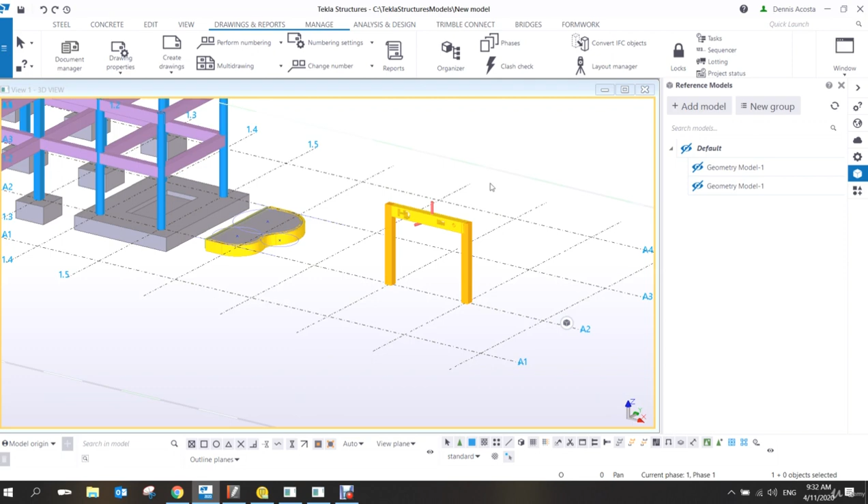But the very basic one is the rebar group. This is something like the origin of adding the reinforcement, the rebar group. So we must know the rebar group so that we can do a lot of things. We're going to discuss about the rebar group first.

So from your concrete part, the easier one to show is this pad footing. So we will start with the pad footing. What I will do is I'm going to select the pad footing, right click, and then create 3D view of part.

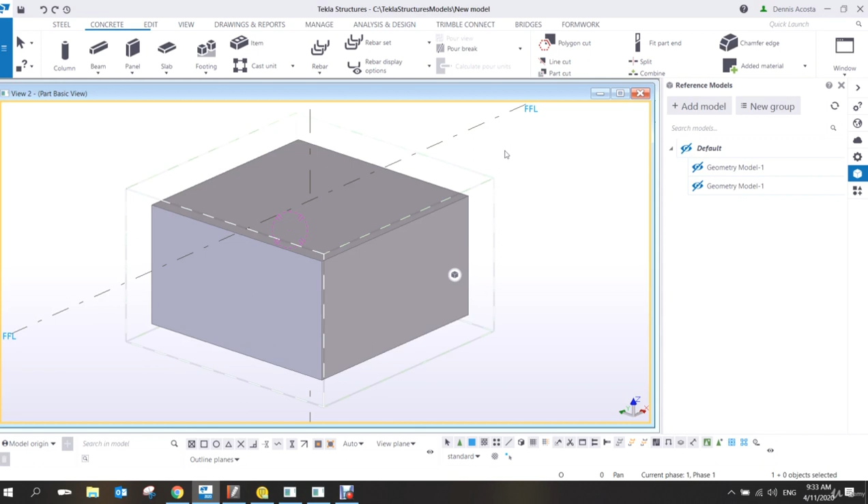Alright, so now since the reinforcement is inside the concrete, we must make it transparent, correct? Because if this one is not transparent, we will not be able to see the reinforcement inside. So just simply press Ctrl 2. Alright, Ctrl 2. Yeah. So now, from the concrete tab or menu, you can see here there is a rebar.

Right? Rebar. Under the concrete, you can see the rebar. This one is the bar group. So from the bar group, you can see here there's a bar group, there is a bar.

Bar group means it's a group of rebar, meaning this one usually used for the links, lateral ties, and if you have many rebar, continues. Then bar, meaning it's a single bar. So you want to create a single bar, that one is only for the bar.

Example of that one is something like a trimmer bar or trimming bar, lifting hook. So that one you can use the bar, meaning you create an individual bar.

And then you have the curved bar group. So curve, if you have something like a curved beam or curved wall, circular bar group, this one usually used for the circular column.

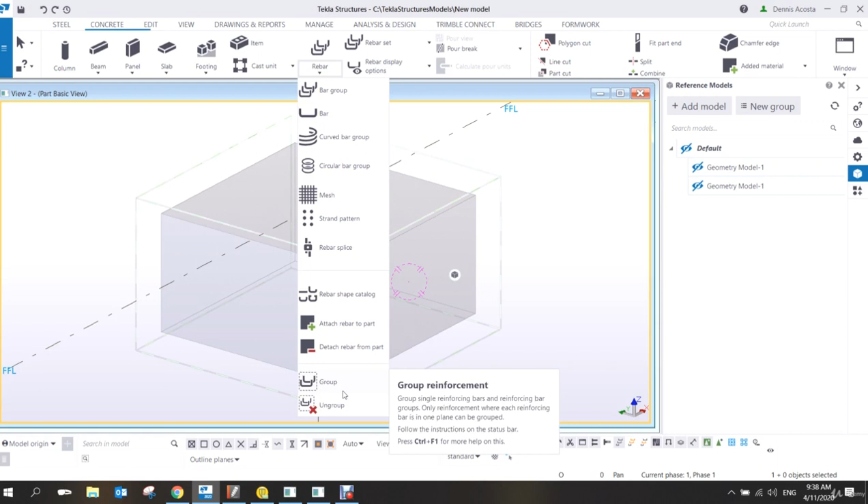And then you have also the group and ungroup. So when you create a link of the bar, when you click one, everything is selected. When you select ungroup, meaning you can dismantle that one. You can select one by one, and then you can group it again.

Okay, so that's the bar group. So first we need to go to this bar group, select the bar group, and then look at the right hand side.

Okay, so from the right hand side, you can see under the general, there is a bar group type. The bar group type is not only a normal one, but if you pull down the menu of the bar group type, you can see that there is a normal, there is a tapered.

So if you have a tapered, it's only tapered is something like this size going smaller, so that's tapered. But tapered ridge is something like a roof, small, big, small. So you can use that one.

Especially if you have a beam that is tapered. Actually, usually I see that one in a precast beam, which is tapered like a roof. You have a tapered curved.

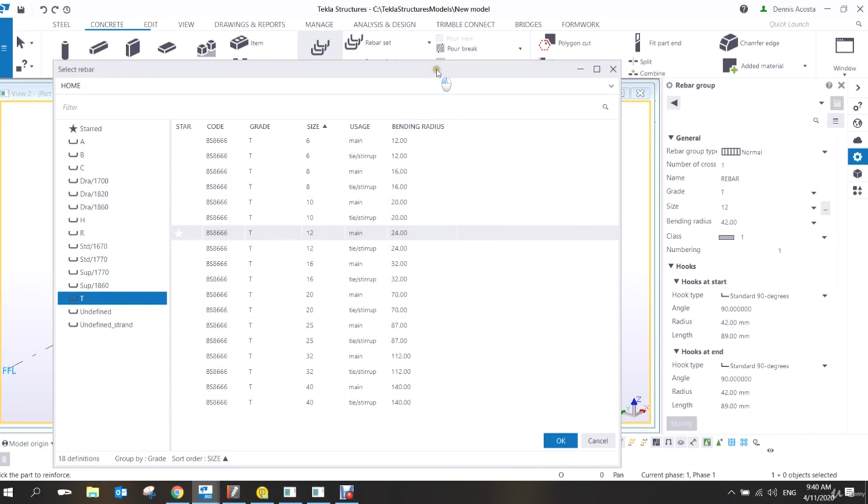Then the name, of course, you can put the name of your rebar. The grade, if you look onto this grade and size, this one is a combo. You cannot have a size without a grade. So if you click on this size, as you notice here, these are the grade available, and then under the grade you will see the size.

So let's say, for example, we're going to use the H. H is for the Eurocode. Nowadays, Singapore is using the Eurocode. Before, Singapore used T, now they're using H. So select the H, and then let's say I'll choose 16, and then click OK.

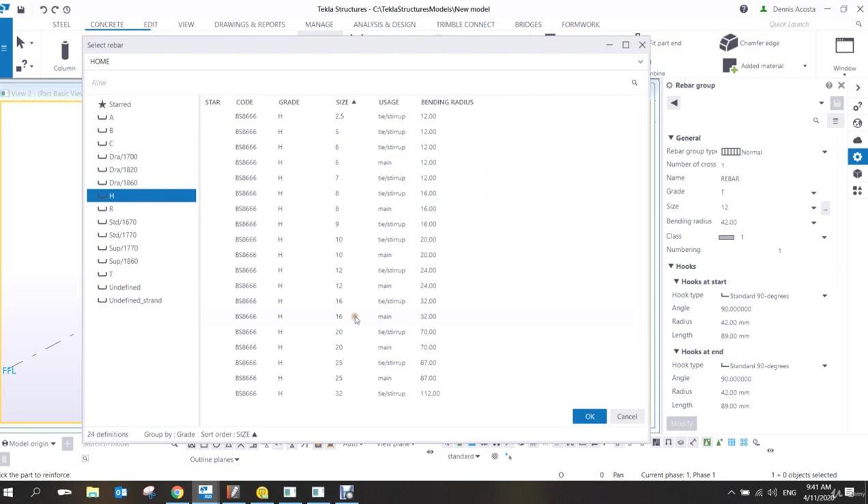16, H16, either tie or main, doesn't matter. So now 16, and then the bending radius of 16 is 32 by default, times 2. The bending radius, that one is inside the rebar database.

Now, what is rebar database? Before we go further, so that you will know, hey, this is where I got this 32. So let me show you where's the rebar database. From your C drive, Tekla structure, I don't know if you install in Tekla structure or Tekla structure program files.

So here 2020, I have the environment, Southeast Asia, general. So I have this profile, and under the profile, you can see here rebar database INP. So if you click on this one, you can see the rebar database here - all the H, all the A, B, C, R, T, undefined, and so on.

So if you want to delete the size of the rebar in the library, then this is the place. If you want to add the size of the rebar, let's say H13, that one is not common, right? I think only Singapore had H13, or maybe here in Southeast Asia H13.

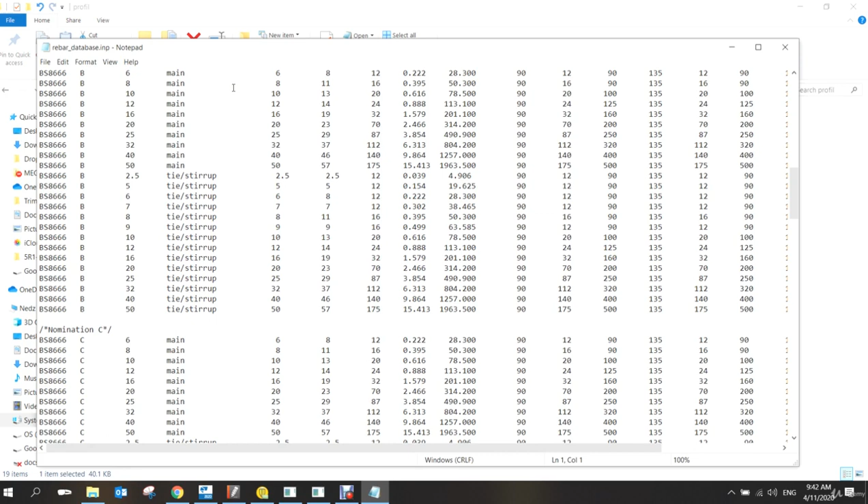It's not here in the default, so you can add here in the rebar database. If you have those properties, then you can add. Now, if you want to introduce another grade, then this is also the place to introduce the new grade of the rebar. So again, rebar database INP, close it, now I'm going to close it.

So here 32, I can change that one anytime. And then the class number, maybe I'll choose 2. For the meantime, you can see the hook - you can see the hooks from the start and the end. At the moment, kindly select no hook.

Okay, no hook. And then the cover thickness, you have on plane, from plane, start and end. For the meantime, again, you type 0, 0, 0. So I don't want you to have any value there. I want you to put 0, 0, 0.

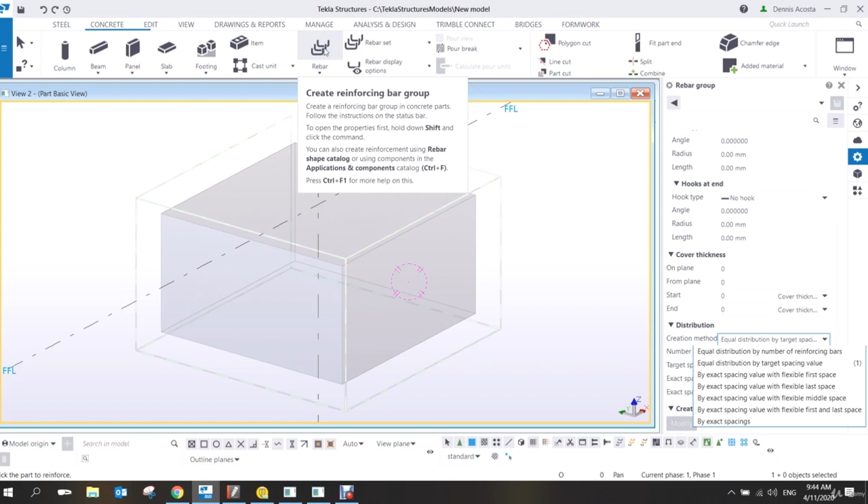And then under that one, you can see the distribution - you don't have distribution. Maybe you are selecting the bar, not the bar group. Yes, because the bar is individual. So you go back to the rebar and select the bar group.

So distribution, you may ask, hey, how to distribute this one? Here, there are different ways to distribute the rebar. What is distribution? That is the spacing. So let's say you pick this range, this 3 meters, and I want my rebar to be 200, 200, 200, 200. So you can choose by target spacing value.

Now, in these 3 meters, I want to have 20 pieces of rebar. So instead of putting the target spacing, you put the number of reinforcing bars, 20 pieces. It doesn't matter what the spacing is, but I want 20 pieces there. So you can choose the number. And you can have this exact spacing.

Exact spacing is similar to what you are doing manually, where you calculate how many rebars. So let's say in the moment connection, I have 10 pieces of rebar spaced 50, 50, 50, and then after that, 20 pieces at 100, 100, 100, 100. So that one is under the exact spacing. Okay, so that's it.

I just want to explain that one to you because later on we will use it a lot, so we need to know what we are dealing with, right? So now it's time for us to add this rebar. Once you click the rebar group, what does it say? What's the next move? Pick the part to reinforce. So what is the part to reinforce? The footing. So I need to pick the part.

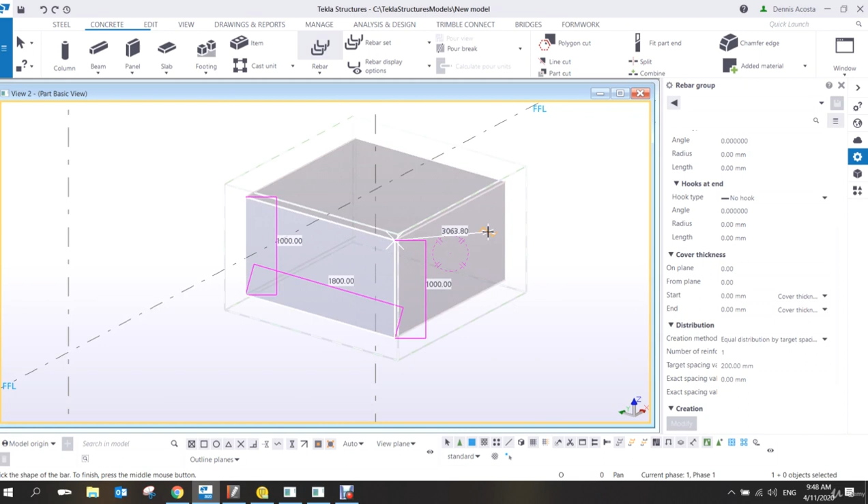Now, in adding the rebar, look, I pick 1, 2, 3, 4, right? In adding the rebar, it's very important for us to look at the numeric values. If you notice here, 1,000, 1,800, 1,000. Is that correct? You can decide. Because if you zoom out too far and pick the point, you might think it's correct. But you can easily identify whether it's in the correct position if the value has decimals, let's say 1,001.25. That's not a common size for concrete. So you can double check that you picked correctly.

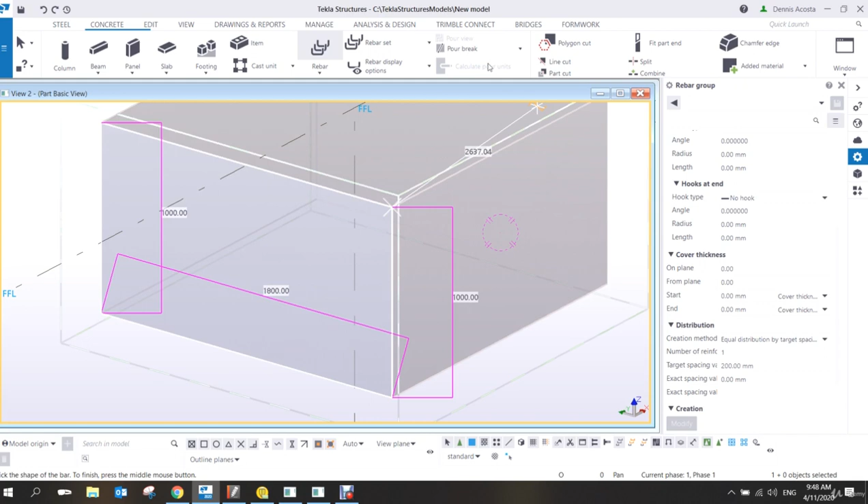So now 1, 2, 3, 4. The next step, if you're done with the shape, is to simply click the middle button of your mouse. Then the next step is pick 2 points to indicate the range. So from where to where? I have the U shape, I pick from this edge, from this point to this point. And that's it. You already have the reinforcement.

Okay? Any question? So, did you manage to do this one, everyone? No.

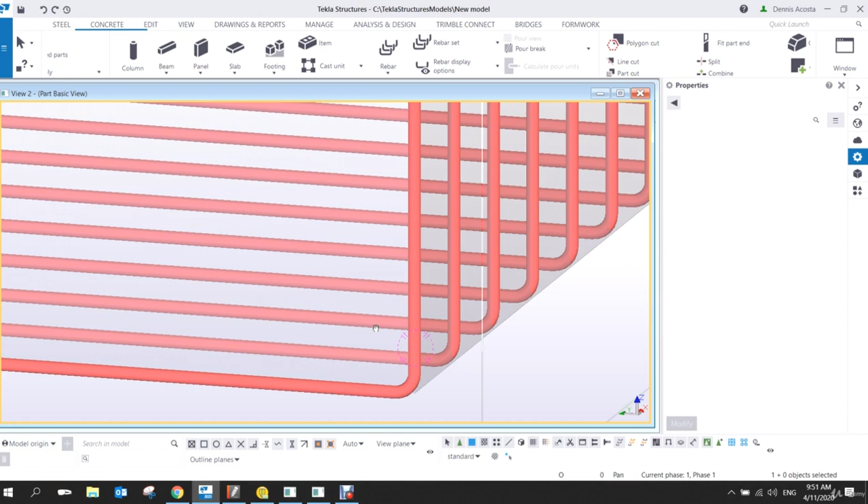Okay, so let's continue. As you can see here, the reinforcement is at the edge of the concrete, meaning we haven't done the cover, so the reinforcement is still exposed, right? So the first one we are going to change is the cover on plane. Select the rebar, and in the properties you can see on plane.

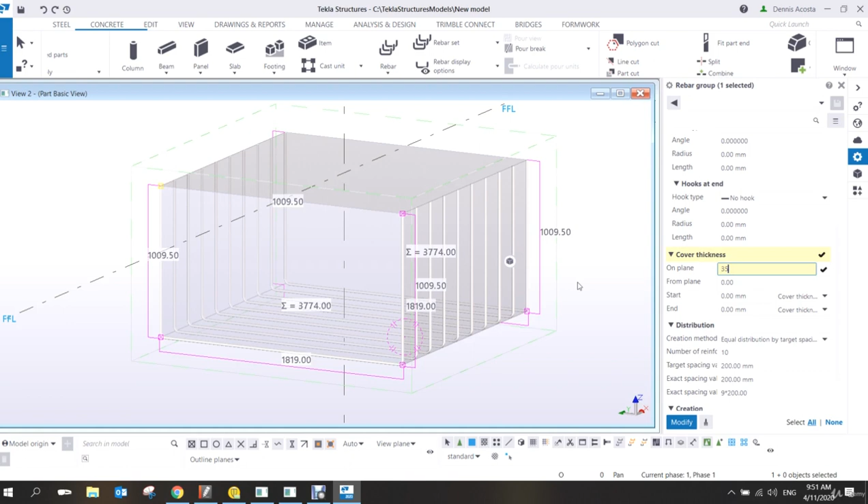So what is on plane? On plane is the cover on the shape that you pick. Let's say we put 35 millimeters, enter. Look what happens. Now it comes inside from the shape that you picked. So that one is the on plane.

Now, if we want to have a cover on the range, that will be from plane. So let's say we type 50 from plane. Or maybe, let's say 100. So that one is the from plane.

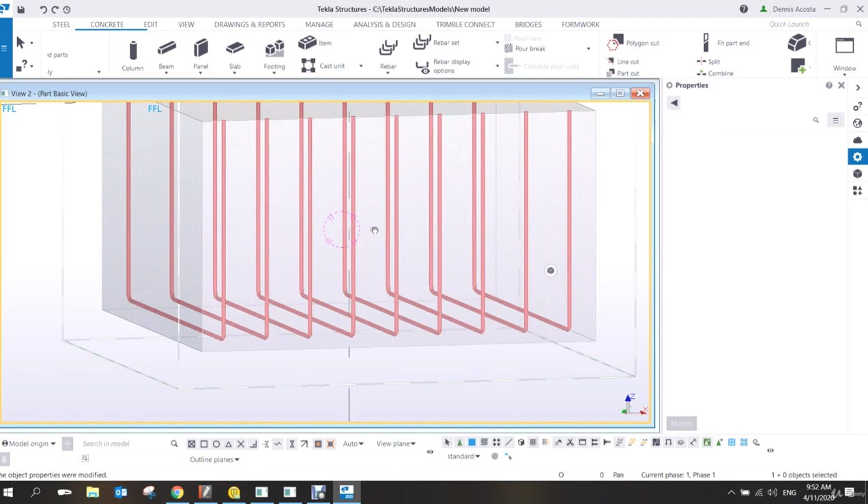Next is the cover at the start and the end. Again, yellow is the start, magenta is the end. So if I type 50 here, and at the end also 50, then enter. Now you have the cover of 50 at the end.

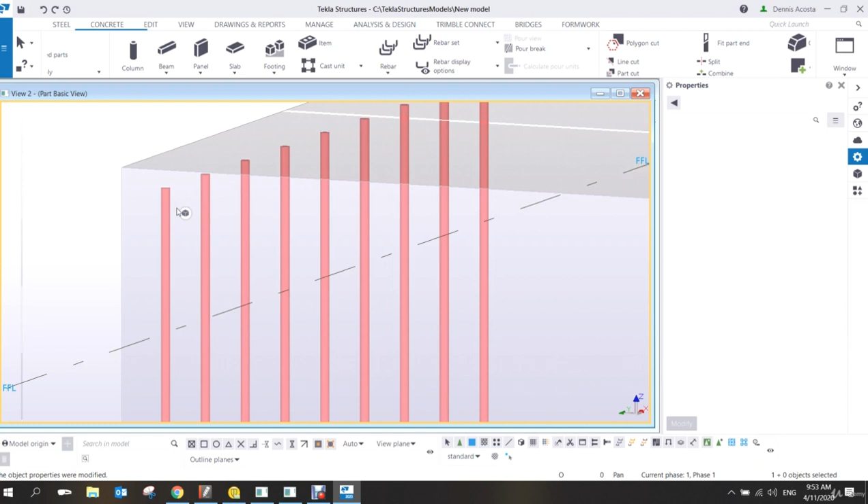Now the question is, I want my rebar to be exposed at the top. All you have to do is simply change this one to negative. Let's say negative 200 and negative 200, then it will be exposed. See? Now you have the exposed rebar.

Okay? And then going back to the hooks. There are standard hooks here: standard 90 degrees, standard 135, standard 180, and custom. So with standard, you cannot change anything there. Because if I click here, standard 90, modify, it will just bend 90 degrees, but I cannot change the radius, I cannot change the length, because it's a standard.

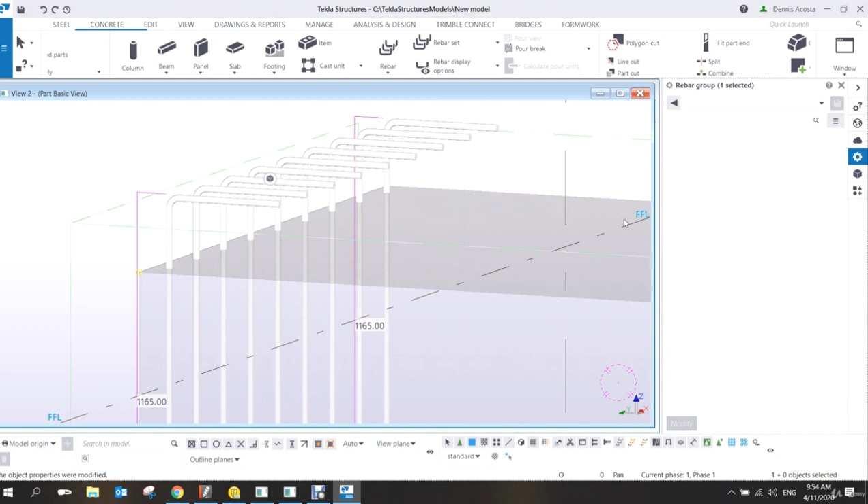Okay? But if I change this one to custom, then here, length, I can change this one to 300, enter. So now I can even change the radius to 20. Question? For the length in the hook, is it counted from the start or the end of the hook? Here, end of the radius. That's the reason why when you measure that one, it is more than the 300. Yeah.

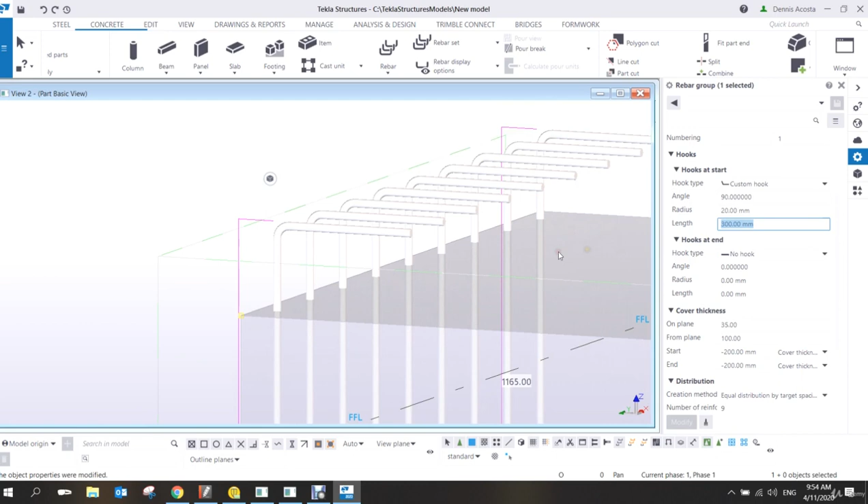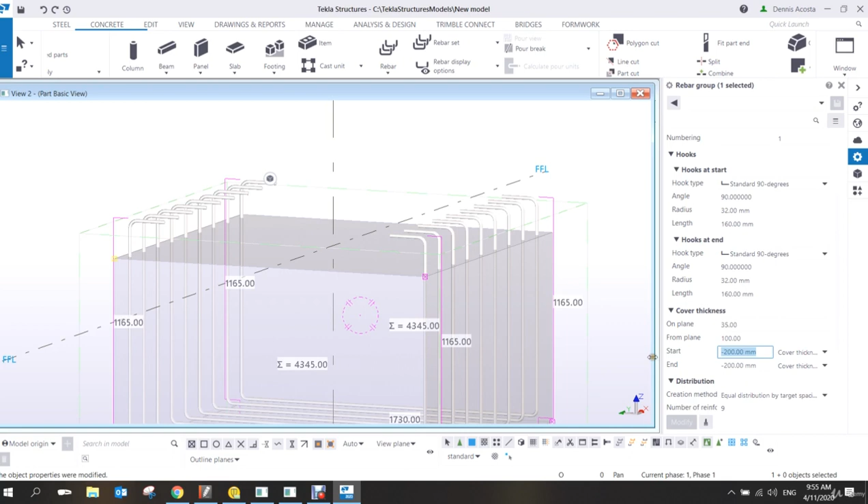And then here, also, if you want 180 degrees, then that's the hook. Okay? So for the meantime, maybe we'll choose 90 degrees and then here 90 degrees and then modify. And then again here we'll put 50 and then 50 so that it will be inside the concrete.

Okay, exercise. Create the U shape on the other side. It should be something like this. So we need to create the U shape on the other side. Same thing. Okay, kindly do that one. Maybe just simply change the color so that we can identify. So maybe I'll change that one to color green. So click. So 1, 2, 3, 4. Yes.

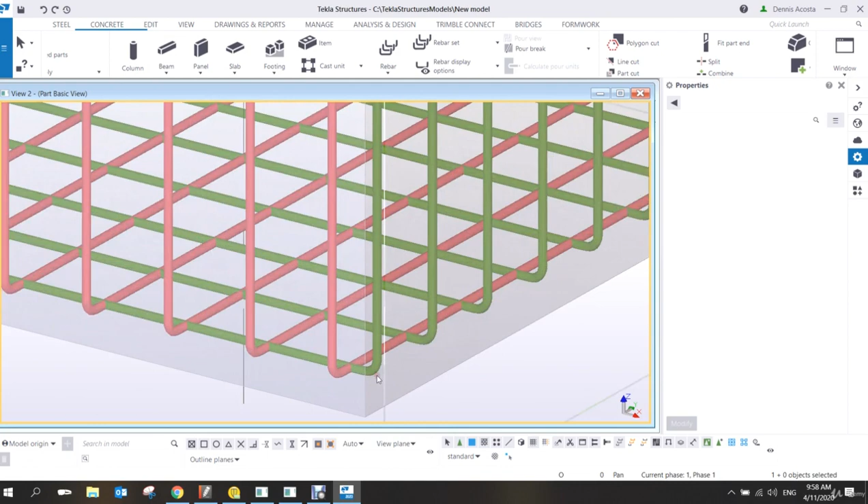Okay, done. So, what did you notice when you created this one? So here, if you zoom in, you can see that there is a collision, clashing, right? There's a clashing between the rebar because both have the same, what do you call that? Cover. Both have the same cover. So we need to adjust. So how to adjust this one?

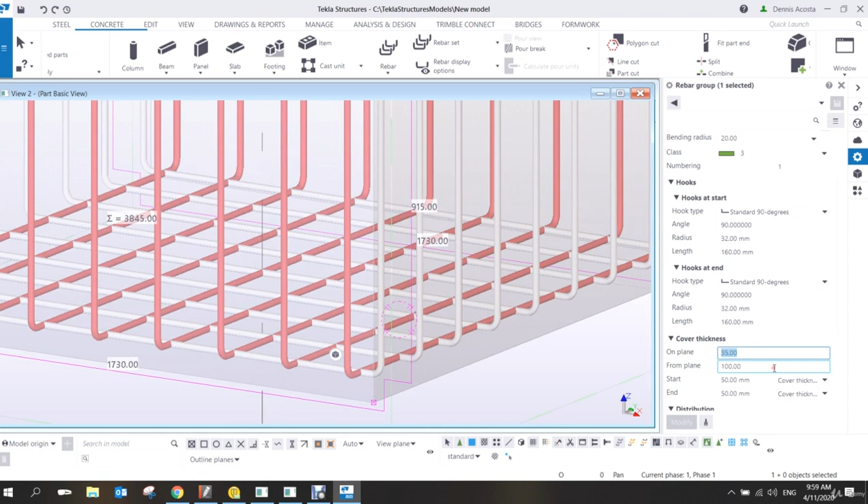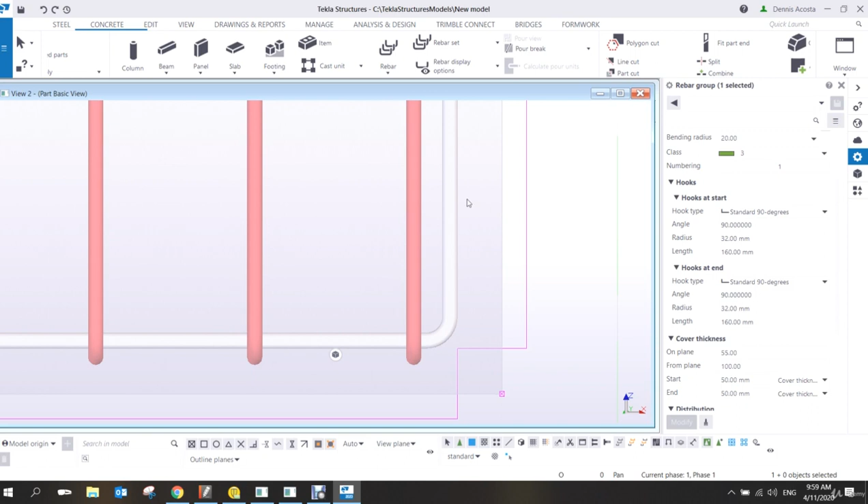So here, if I select one of these and then go to the on plane, you will notice this on plane is 35, 35, 35. Three sides, right? Now, if I change this one to, let's say, 45 and then modify, or sorry, maybe 50. Okay. Still, because this one is quite big. So let's say 55. The thing is, okay, there is no collision on the bottom, but here, this one becomes bigger. This one 55, 55, 55. But I want the sides to be the same, 35.

So what we need to do here is we need to change this on plane like a distance list. So similar to what we have done in the grid, there is a space. So we can do the same. So let's say here, the first leg, we need 35. So the first leg, I'll put here 35 space. Then the second leg is 55. And then the third leg is 35. So enter. So there you go. So now this one is still 35 and then this one is 55. So there's no clash between the two.

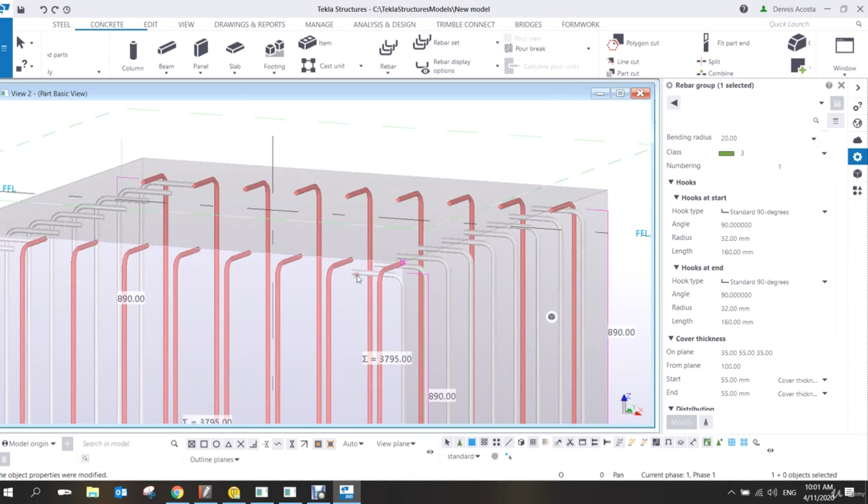Okay? Again, here on the top, you can just simply change, let's say this top, instead of 50, I'll put here 35 and then 35 and then this one should be 55. 55. That one is the start and end. The start, I put 55 so that it will not clash.

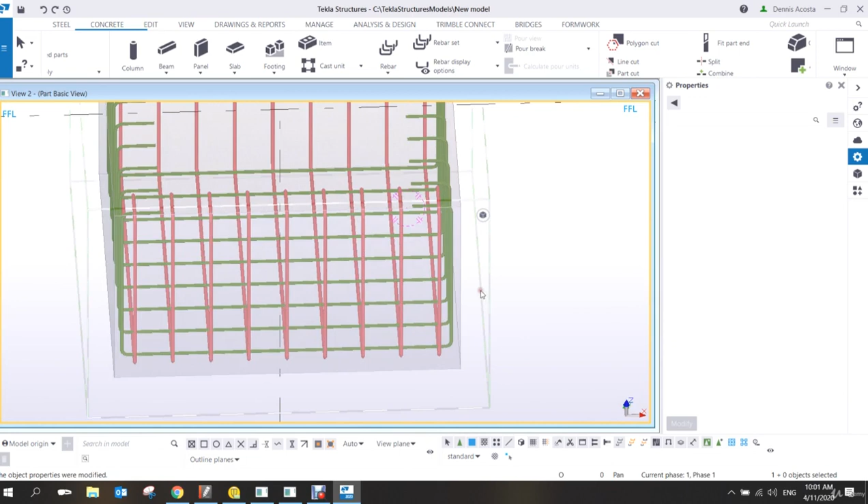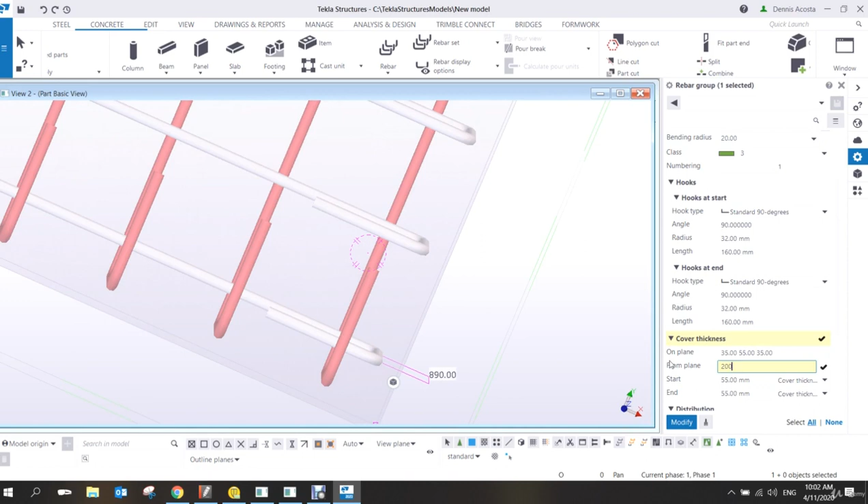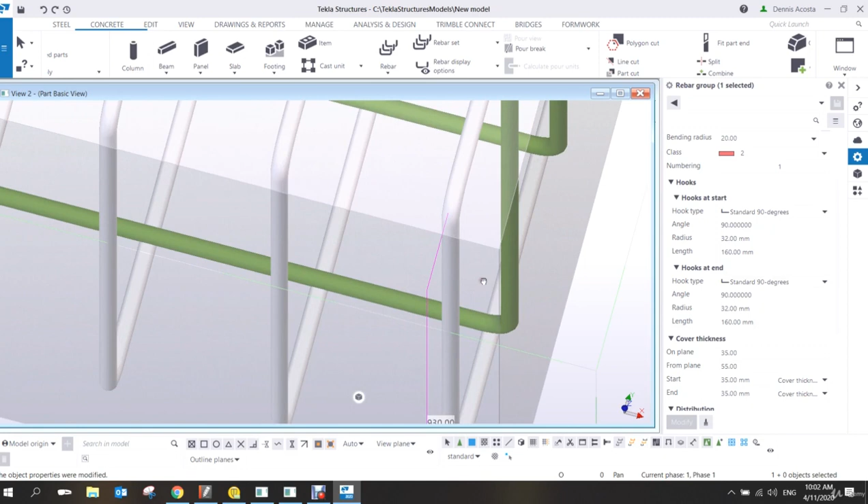Okay, what if I want one of the rebars to be in the corner? Okay, one of the rebars to be in the corner. What we can do is this. This one, I can adjust to 200. This from plane is 200, enter. And then this, I'm going to adjust this one to 55, modify, or maybe, sorry, or maybe 35. So that will be on the corner.

Yeah, that should be okay because we're going to add now the lacer bar. Okay, we add the lacer bar, the link, the closed link. So how to add the closed link? To add the closed link, we're still using the rebar. This time, use the 8mm bar, 8 dia bar, and then you can type here, let's say links. And then the class, you can use number 6. And then the hook, use 135 degrees. Hook, 135 degrees, okay?

So links, and then H8, okay? And then for the cover thickness, you can type here 25, and then the from plane, you can say 100, and then the start and end must be 25. Okay, remember this one.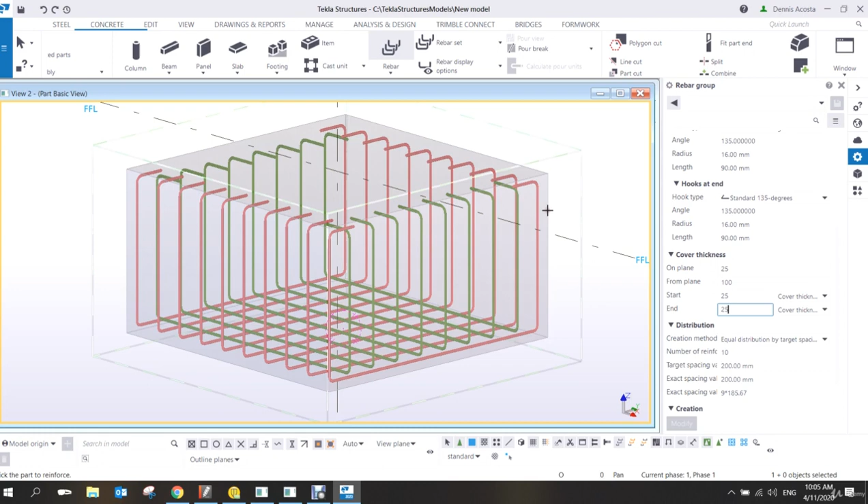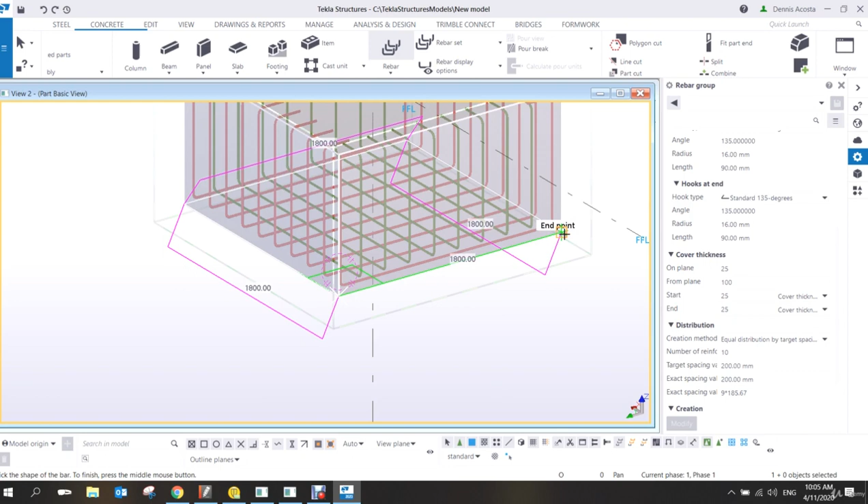So, now, pick the part to reinforce, the concrete. And then here, 1, 2, 3, and then rotate. 4, rotate, and then 5. So, meaning 1, 2, 3, 4, 5. You end where you start, because it's a closed link. And then middle button of your mouse. And then what is the range? From the bottom to the top. 1,000. And look, so you have a very nice lacer bar.

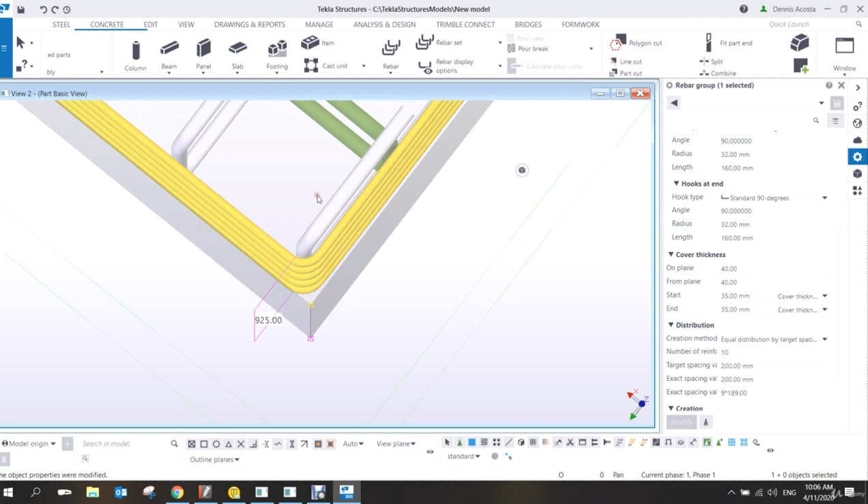Since this one is touching, maybe I can change this one a little bit from plane to 40. So you just adjust as necessary. Okay, so now we have the pad footing.

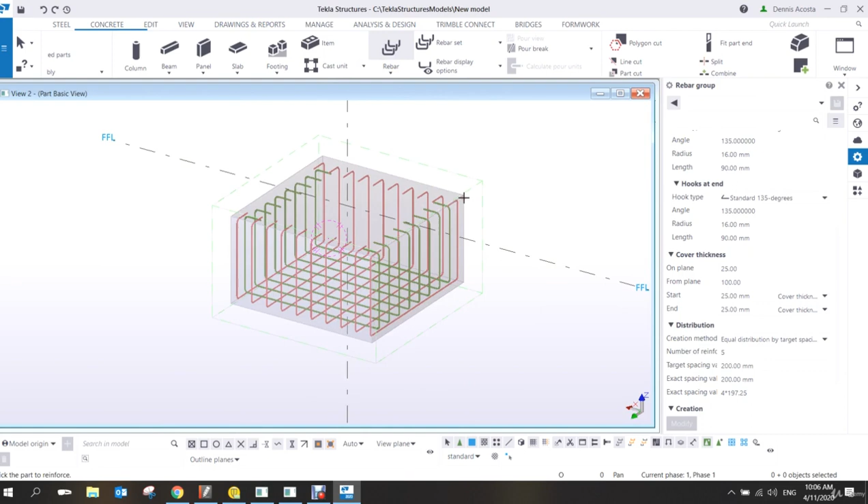Sorry, can you do this one more time? The lacer bar. You don't need to explain. So bar group. Pick the part to reinforce. You don't change any profile, still the H. But I changed that one to 8 mm, a smaller one. The side. So 1, 2, 3, and then 4, and then 5. Middle button of your mouse, and then 1, 2.

And there you go. How can you change your radius to 20? Because I only have two options, 16 and 32. You can just type.

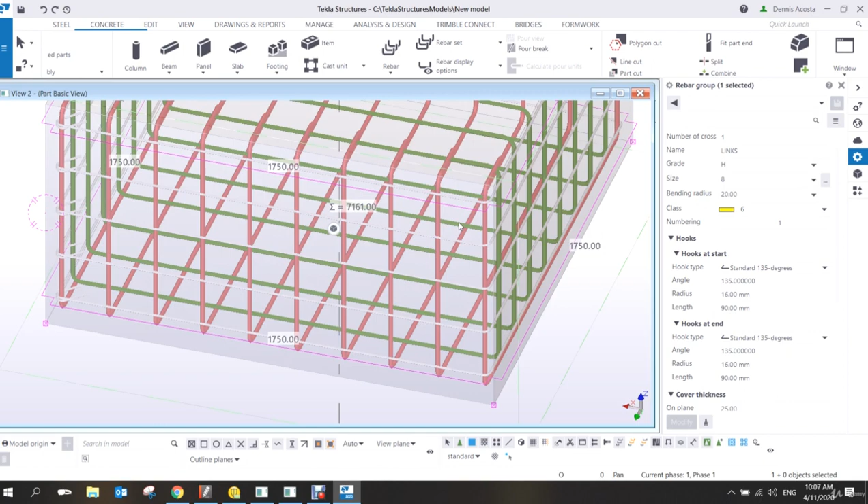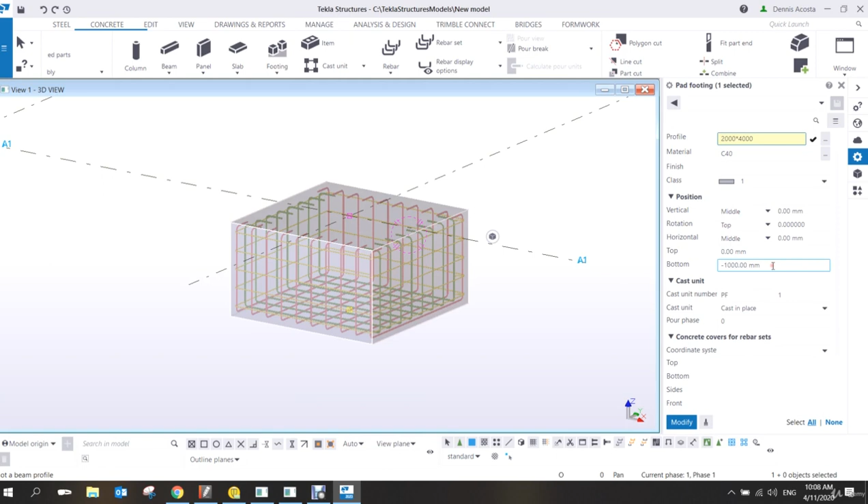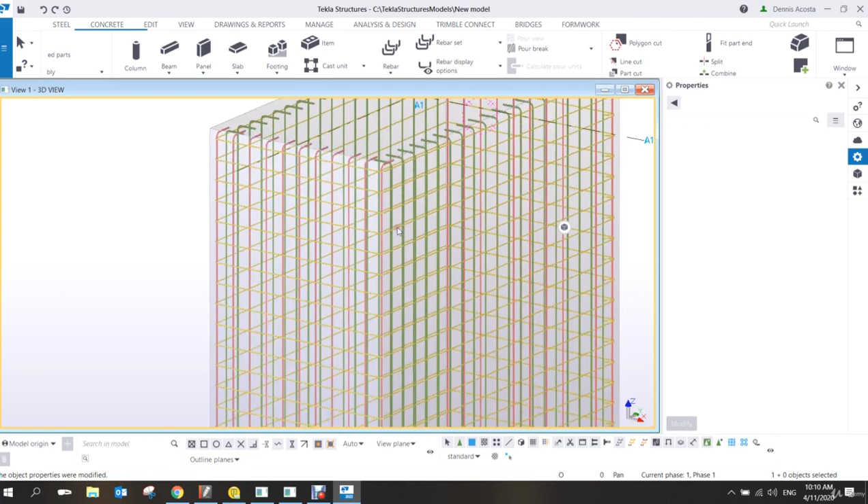Now, after that, kindly change the size of your concrete. Change any size. Let's say 1,200 by 2,000. Change also the height if you like. Make it longer. Exaggerate. So here, I'm going to put 2000 by 4000. And then here is, let's say, negative 5000. Okay, done.

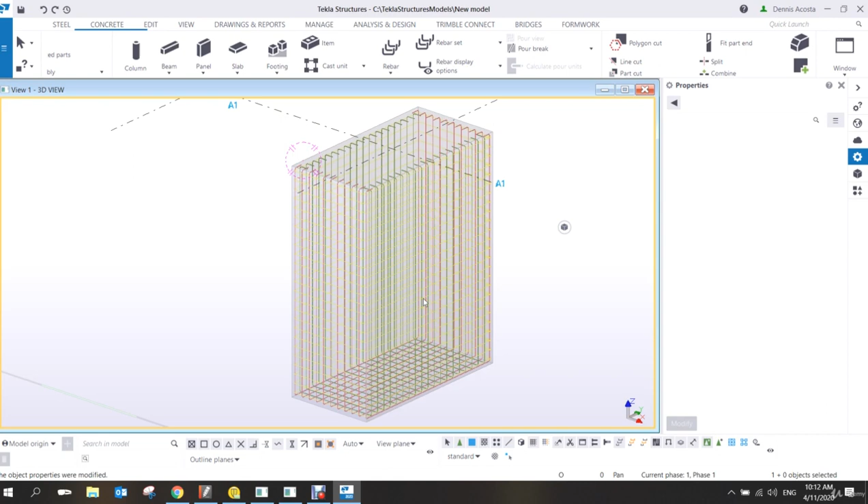So you will notice here, even if I change the size and exaggerate it, it will follow as long as you perfectly pick the edge of the concrete. And then the good thing is this: if you select assembly, and then you select this footing, select assembly, and then select the concrete.

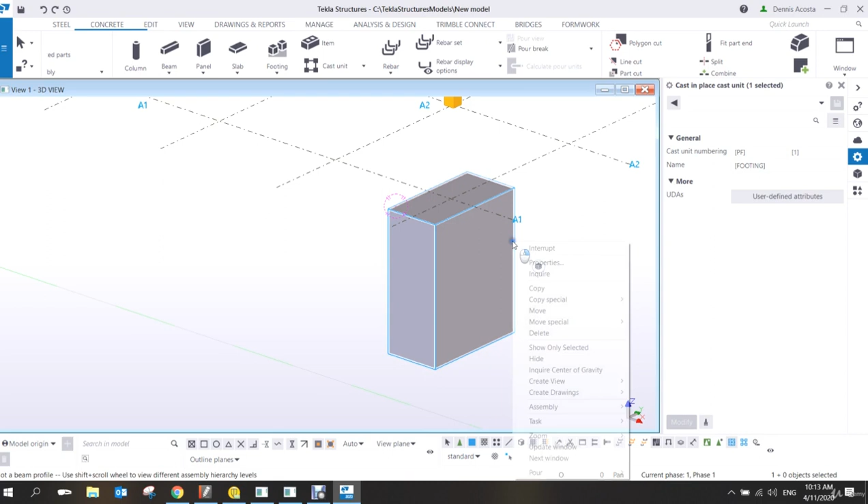Right click, copy all contents to another object. And then pick this one. Remember, from this size of the concrete, then I'm going to pick this one. See? So it will adapt.

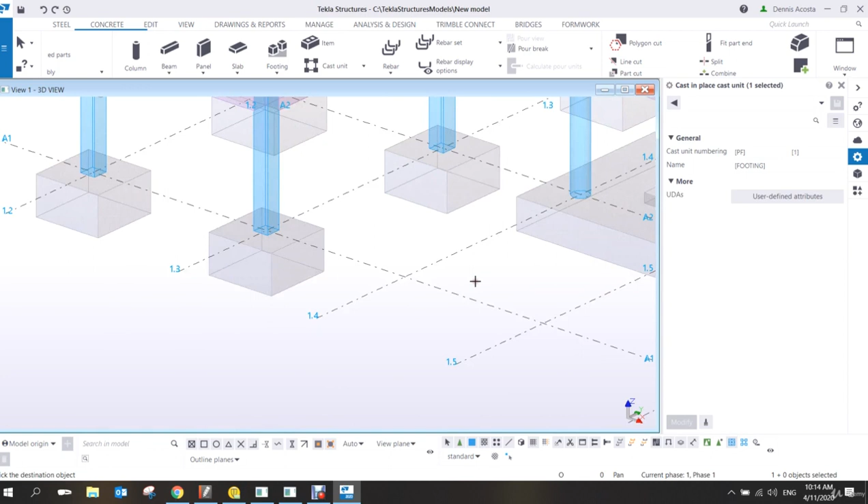Select the concrete, right click, copy all content to another object. And then click on the pad footing here, the smaller pad footing. So even if you added that one manually, it's already intelligent enough to adapt to the different size.

Click on your rebar. I want to see your properties, the one that you have now. This one. Yeah, correct. Standard 135. You can use 90. I just use the standard 135 for the bending at the end.

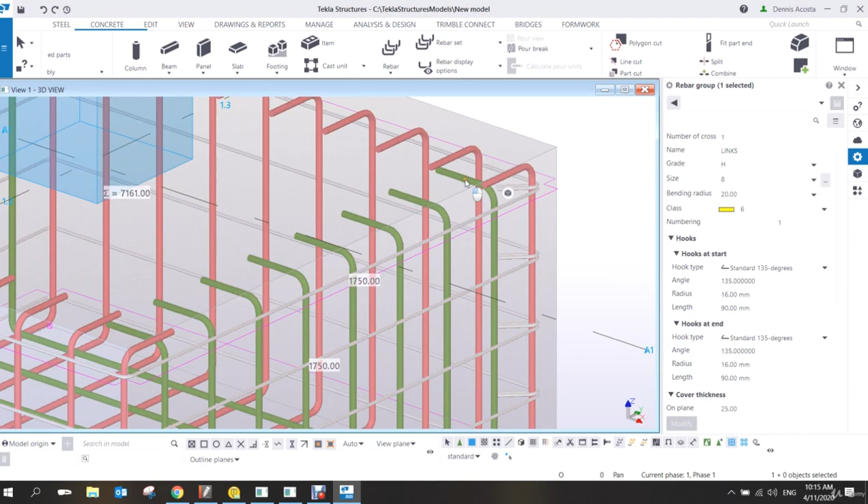This one is not a group anymore, right? It's just a normal bar? It's a group bar. Still a group bar. There are three groups. It's still a group bar. Yeah, see?

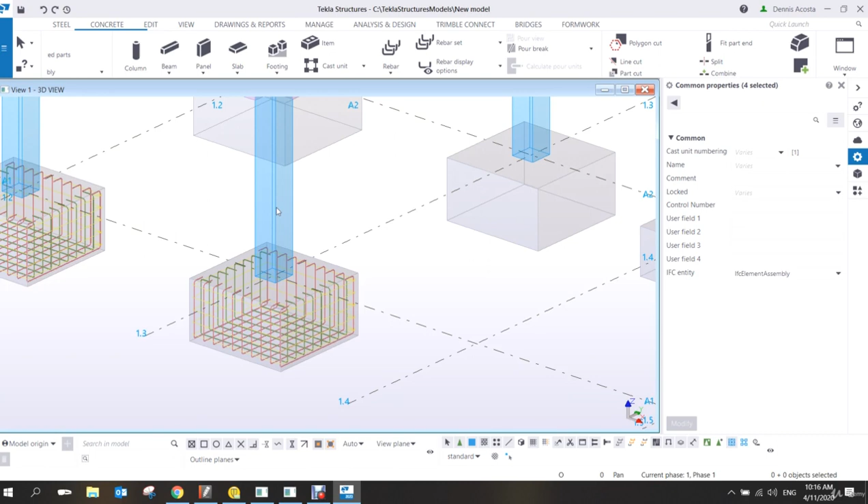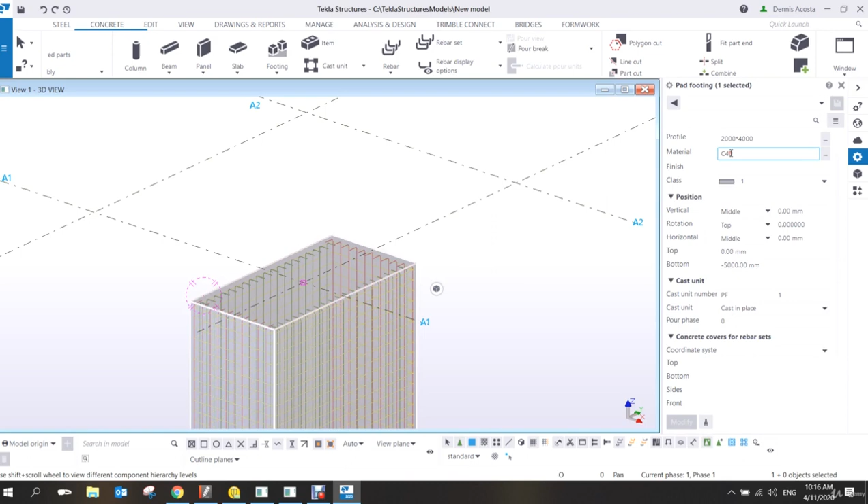The copy only works if it's copied to similar types. Similar type, yes. Let's say, for example, you want to copy this one to the column, it will work. But of course, not the way that you want, because it will be something like a small U bar in the column, which is wrong. Okay? Done?

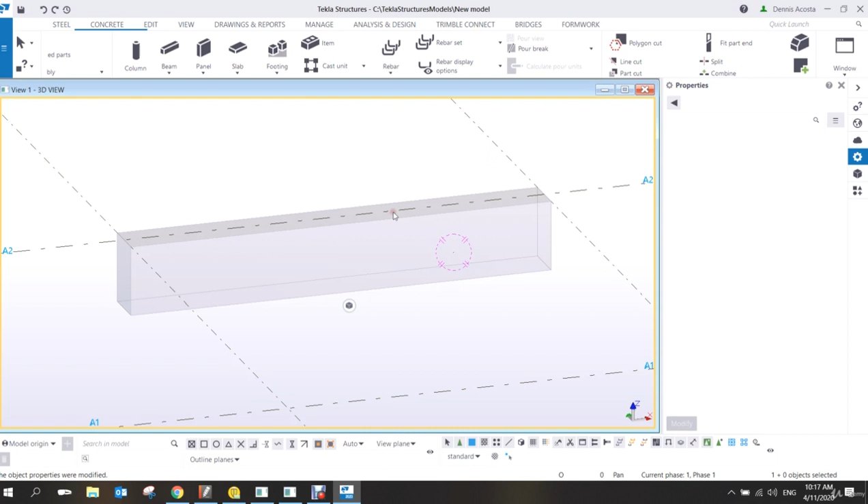So let's do the next one. Next, I want you to create a beam. Can you change the beam size to 800 by 500? 800 by 500. And then create view, 3D view of part, and then Control P, like this, a front view.

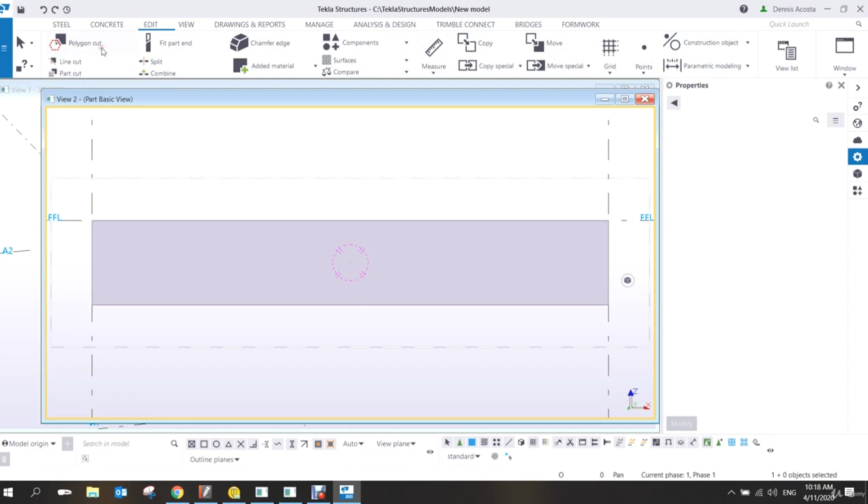What we are going to do here is change this one to be a tapered beam. So how to make this one a tapered beam, from yesterday's topic? Using cut. It's either line cut or polygon cut. Don't use the fit part, it will not work.

But here, let's say line cut. So select the beam and then pick one and then just click on the center, 2, and then remove this excess. So now I have the tapered section.

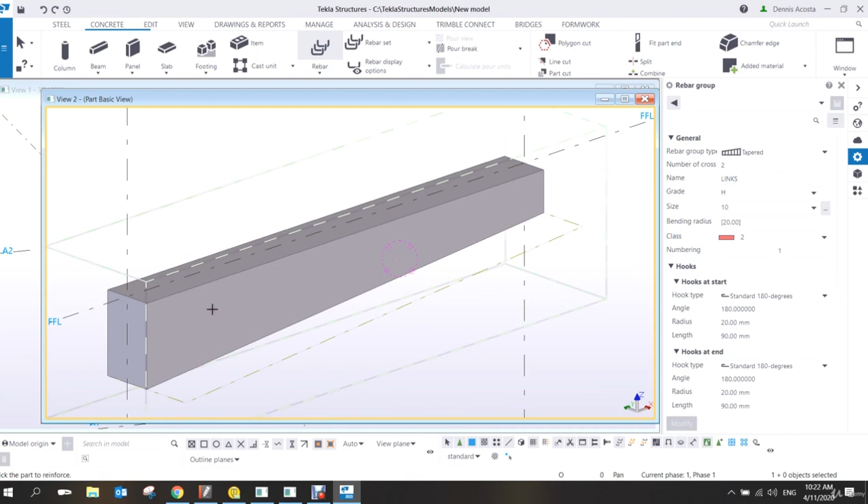So, since we're talking about tapered, in the rebar group type, select the tapered one. Earlier, when we selected the normal, the number of cross sections is only 1 because both ends are the same. But since we are selecting the tapered, the number of cross sections is 2 because this size is different on this side. So now, pick the part to reinforce, which is this beam. Click here, 1.

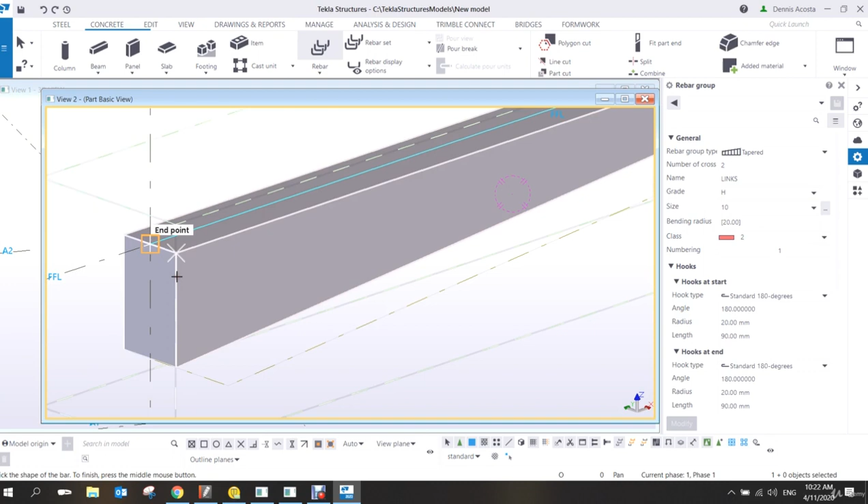Look, I started from this point, 1, 2, 3, 4. Middle button of your mouse. So again, this one, 1, 2, 3, 4. Since I start on this point, I need to start also on that point on the other end. So 1, 2, 3, 4. If I click the middle button of the mouse, the reinforcement will be shown there. No need for you to pick the range because you already picked the 2 ends. So middle button of your mouse, then you have now the tapered reinforcement there.

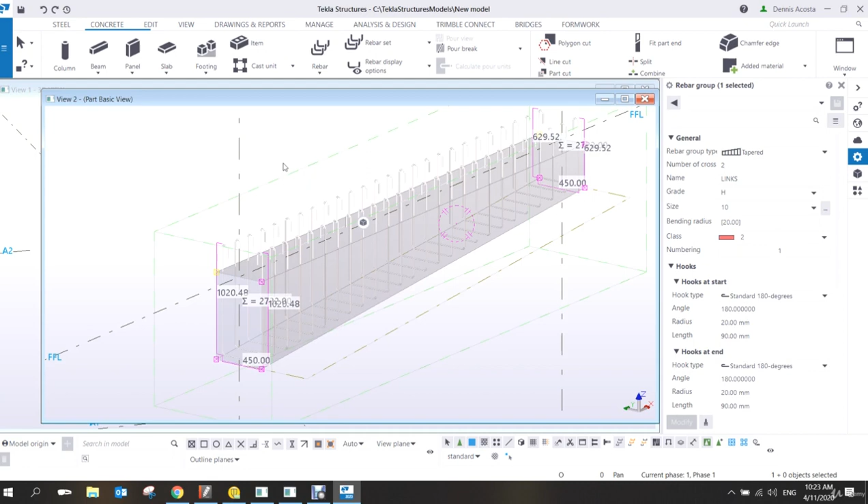So, the next one is we add the main bar. Again, we'll use the bar group, and here we type main bar. I'll use bar 20. Then no hook, a straight one. The on plane, I will choose 40. From plane is something like 40 as well. Let's say negative 250, negative 250. This time, in the distribution, I'm going to use the number of reinforcing bars. I will put only 3.

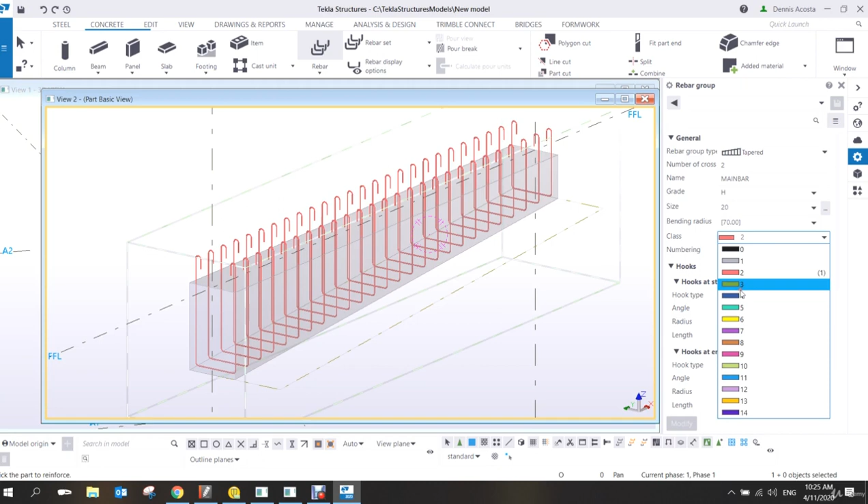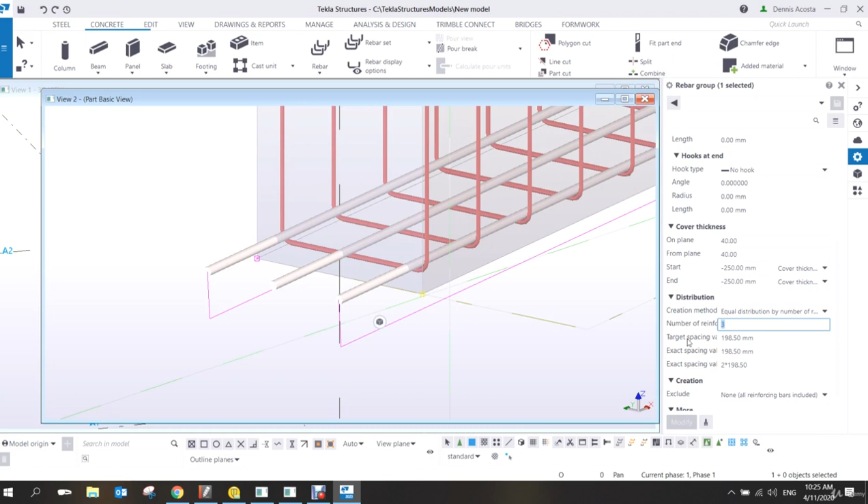So pick the part to reinforce. Again, this beam. And then 1, 2, middle button of your mouse, and then range 1, 2. Sorry, I forgot to change the tapered. Change this one to normal. Then pick the part to reinforce, 1, 2, middle button. And then it's just a straight bar. See here? If you want to have more rebar, go to this distribution and type, let's say, 5.

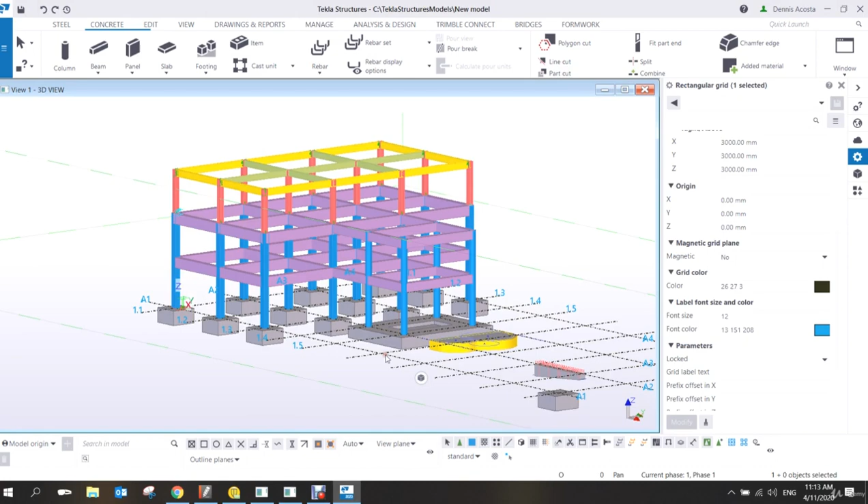So, now we're going to have a break so that we can move on to the other example as well.

Okay, so I'll start with this column. Again, for this column, I'm going to show only selected. And then I'm going to create the main bar first. For the main bar, H20, let's say this one is 2. Then the hook at the bottom will be 90 degrees. At the end, if my end is at the top, then no hook. And then on plane, I'll put here 45 and from plane.

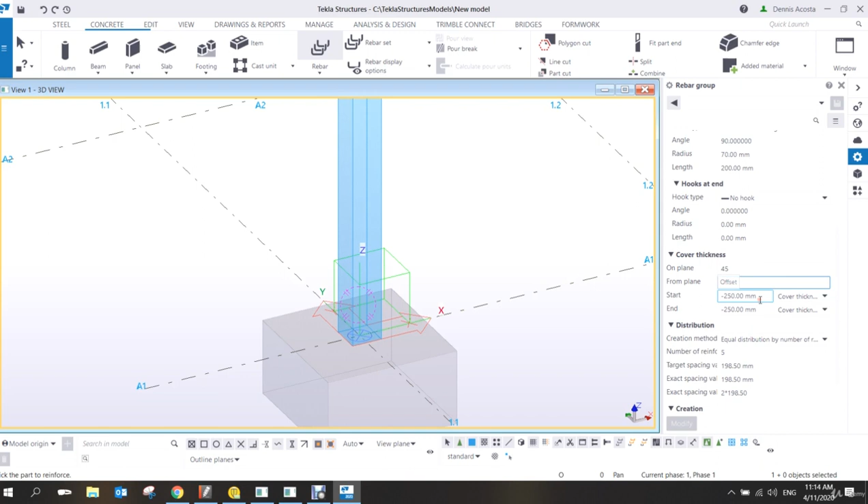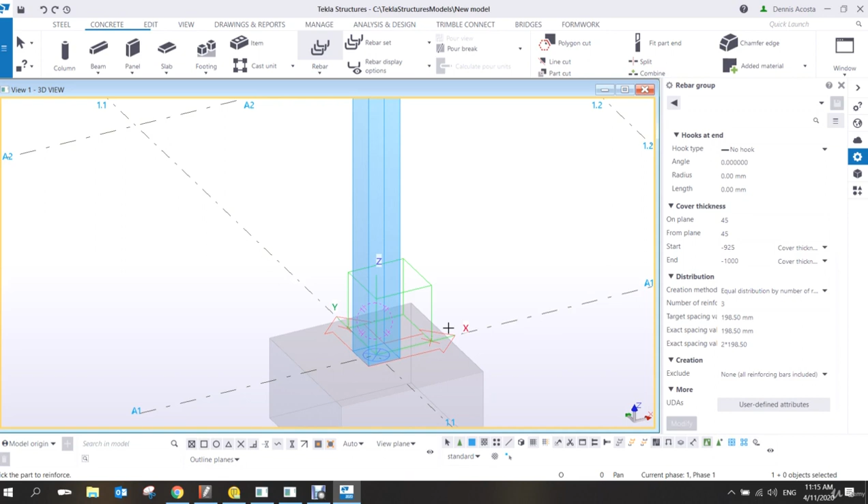The start will be at the bottom. If this one is 1000, then this one will be, let's say, negative... what did you put? 850 or 9? Let's say 925. And then here is negative 1000. And the distribution will be 3. So actually, let me show you how I will do this. What you have done is okay. If you think this one is similar to what you have done, then good. If not, check which one is faster.

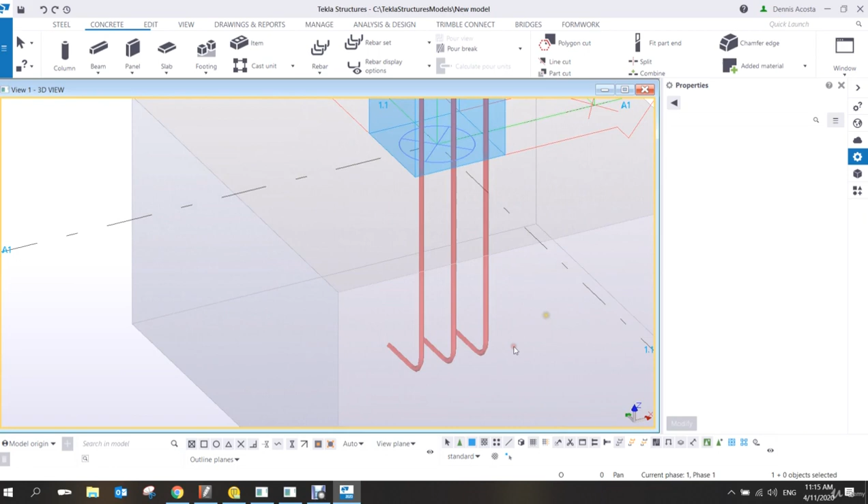So I'll pick this one, then 1, 2, middle button of your mouse, and then 1, 2. There you go. Here, because the bending is from the other side, no worry, I will simply select the custom hook, change this one to negative 90, and put this one as 20. What is this one? 400, right? So I created one. All I have to do is go to the plan view, select, right click, copy, rotate to the center. How many copies? 3. Angle 90 degrees. Copy.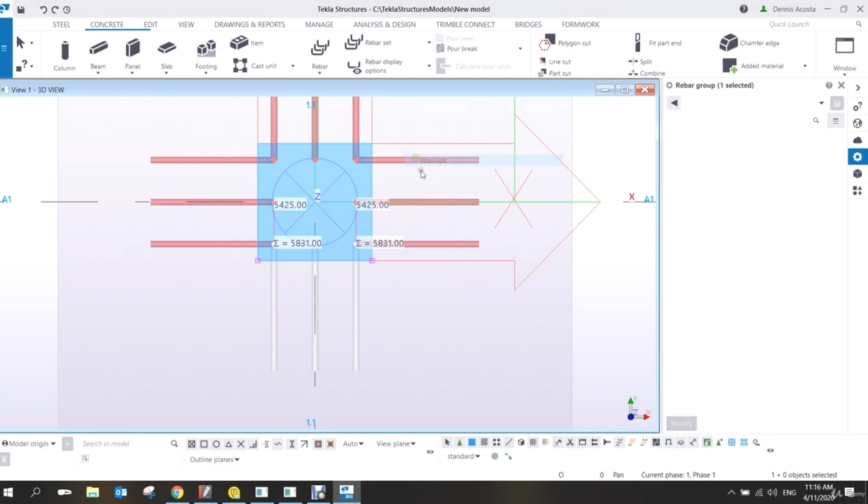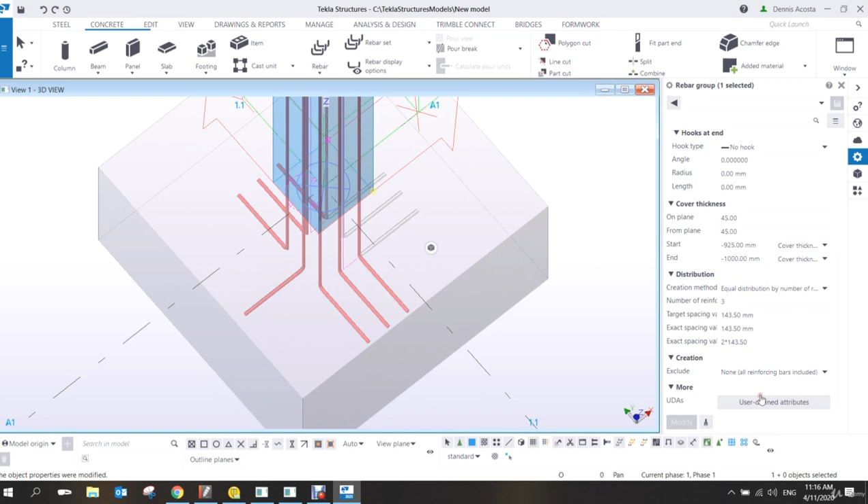But there's a problem because I need only one here, right? Select this one. From the bottom, you can see here creation. So I will not create the first and last. Modify. This one, I will not create the first and last and then modify, and that's it. I have already the.

So did you do the same? No. Okay. But it's fine, yeah. This from the copy part that you copy number. Can you do it one more time? Yeah, sure. So meaning I have to create only one. Okay? Then what I will do, if there's no rebar on this side, then I can just simply copy mirror. Okay? Or the other way.

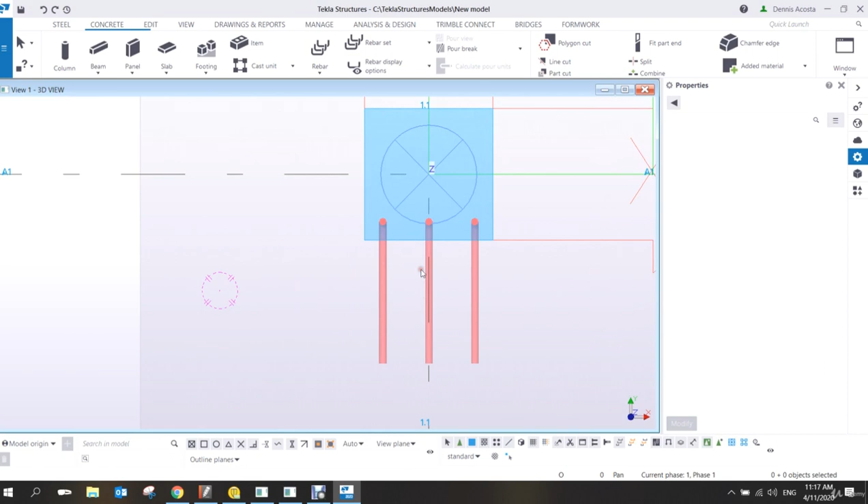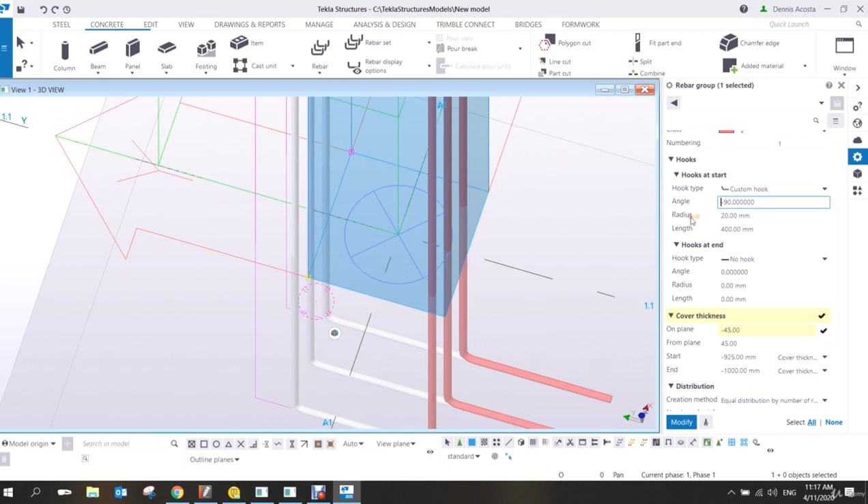Before I copy that one, I just want to give you a different method. Actually here, look, if I simply copy this one, right click, copy, just simply copy from here to here, look what will happen. Right? But this one, it's still okay. Why? You can adjust that one to -45 and then the hook will be positive. See? It's the same. Okay? That's one way, another way.

Then for the copy, so what I did is select, right click, copy, rotate. Copy special, rotate. Pick the center point. And then number of copy, 3. 1, 2, 3. And then angle, 90 degrees. Copy. And then this one, I need to change this. Exclude the first and last, modify. Exclude the first and last, and then modify.

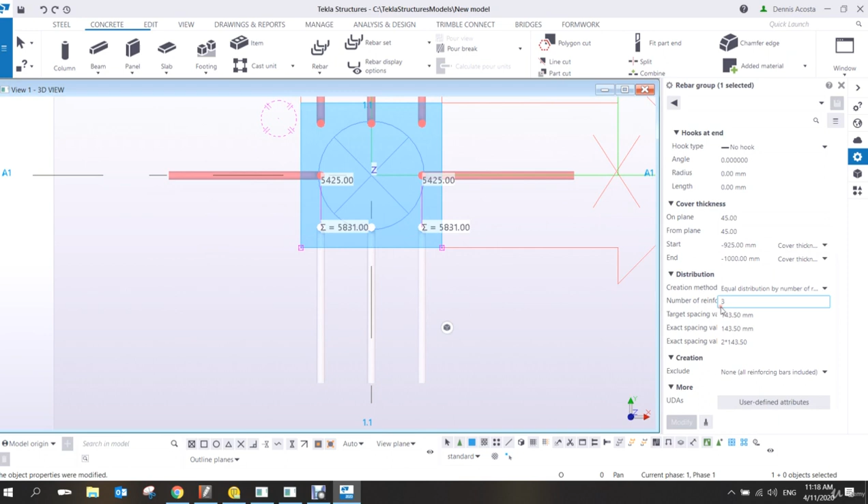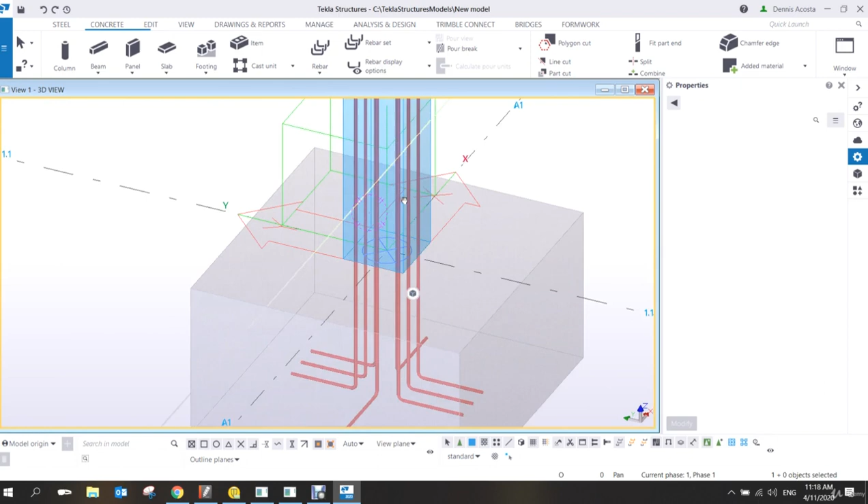I don't know if this reinforcement number 1. Oh no, if it is reinforcement number 1, it will be on the one side. Okay, so that one doesn't work in that case. All right. So in no time, you have already the rebar for the main bar, and then for our links, that one will be easy. It's the same thing. So rebar group.

So select this one, then type here links, and then H10. Okay, H10. Then let's say select other color here, and then the hook will be 135. 135. This one will be 25. From plane, I say, okay, this one, from plane, I'll put 50 from plane, but now look at the start and end, it should be 25 as well, and 25. Okay? In this case, you will notice that the link extended to the bottom, right?

Okay, so look. What I will do is this. Pick the part to reinforce, and then 1, 2, 3, 4, 5. Okay? Middle button of my mouse. Okay. So, for the range, I'm not going to click this one. Why? Because if I pick this point, what will happen? It will merge to the point of my shape. Did you notice that one? If you pick the same point, the point of the shape is the same point as the range.

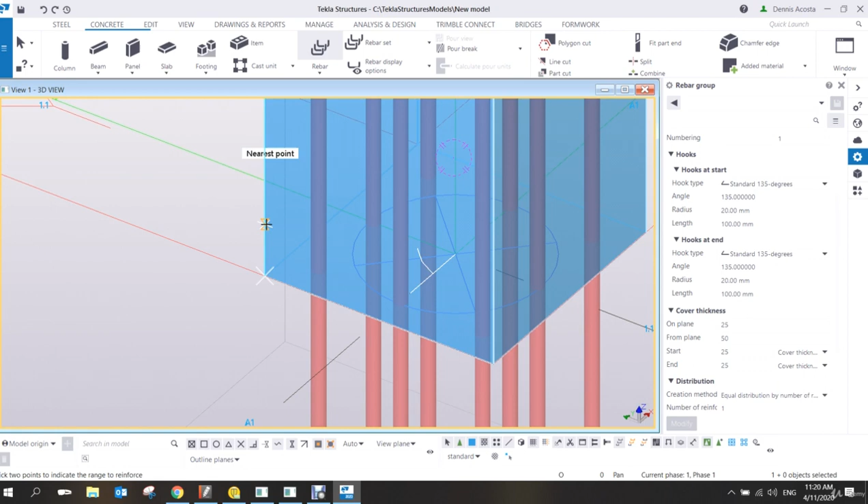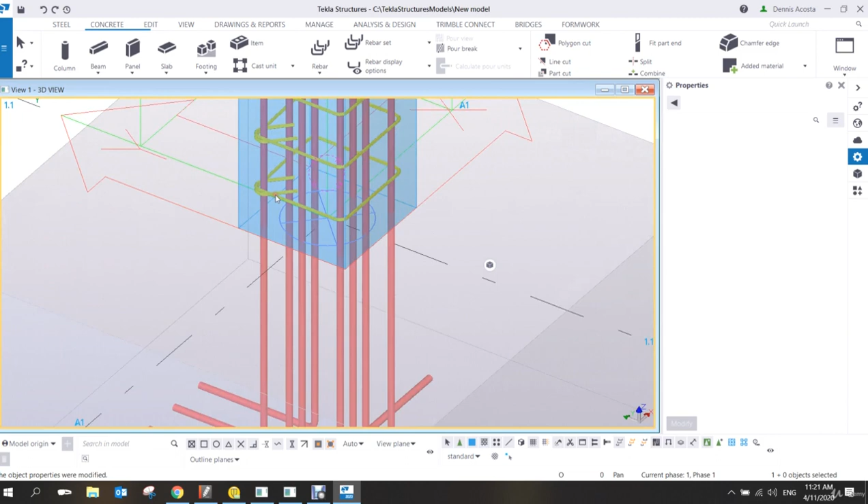Correct? So what I will do is I will pick the range somewhere here, anywhere here, so that I have a difference from the shape. So pick 1 and then 2. Okay? So nothing there because this one, I need to put spacing 200 and then modify. Alright? So look, now, since I picked this point, look at my point here. Right? So what I will do is select that point, right click, move, and then I can move it here. You can put a construction point if you want to have a precise location.

Okay, is that clear? Okay, so you can try. You can try again this method if you think this one is faster. But if you think what you did is okay, then I don't have any issue on that. Okay? Click on it. I won't see the box. You mean this one? Yes, correct. Yeah. Please scroll down. The number is how many? The number is target spacing, is 200. Exact distribution, distribution. The second one, equal distribution by target spacing.

Okay, by the way, please take note, when you say equal distribution by target spacing, means the target is 200. The target is 200, but not necessarily the spacing will be 200. So the range will be up to 200, but the spacing of this one could be less than 200. Not clear spacing, is it? Yeah, this spacing. Our target is just 200, but it's not exact. If you like it to be exact, then there will be a flexibility on the top, on the bottom, or on the middle. Okay, so remember that one.

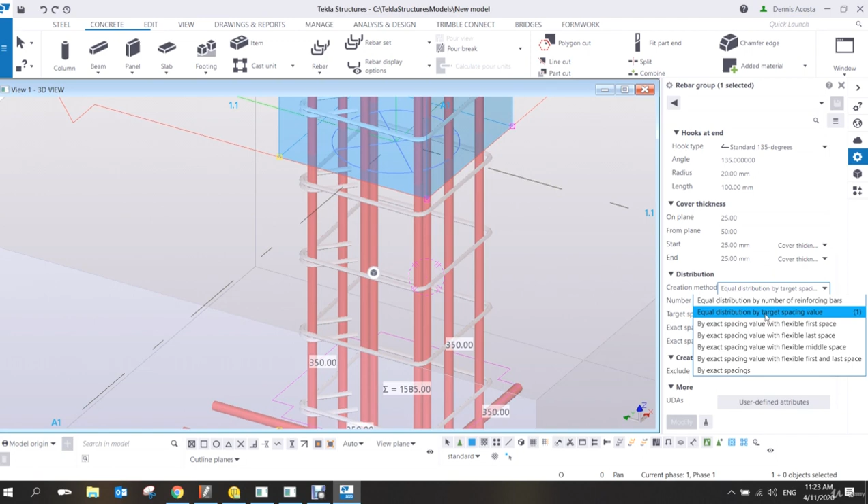How did you bring it down inside? Yeah, that is the one I've shown you earlier. Let me just repeat. When we create the link, okay, look, select, then 1, 2, 3, 4, 5. Okay, so that's the shape.

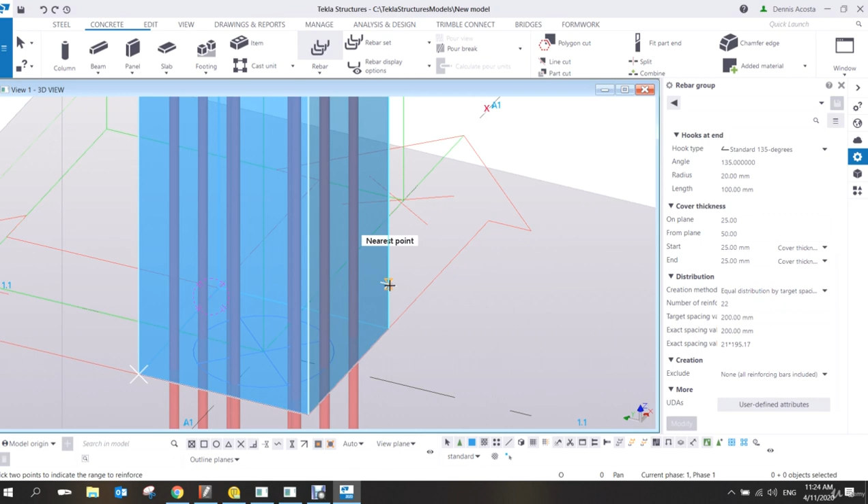Middle button of my mouse. Usually when I pick the range, I pick the same point, right? But you notice that if I pick this point, it will merge to the point of the shape. So what I will do is, I'm going to pick somewhere here, or maybe I press Control to identify the height, or I put a construction point. But let's say I'm going to pick anywhere, okay? The range, 1. The important thing is you pick the end of this one, right?

2. There you go. Now, since I picked somewhere here, that point will be shown. Imagine if I pick the corner, then it will merge to the shape, and then it's difficult to select which one to use. Now I can easily select because it's here. So I will just simply right click and then move from this point to, so if that one is 80 plus 800, let's say 880.

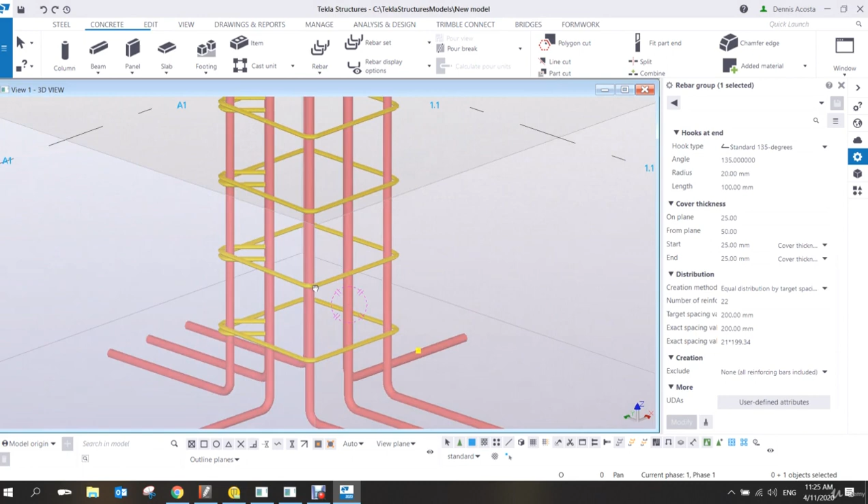And since we're here, oh sorry, I want to ask you this one, right? I put this one, then I want to do it. Okay, copy. Yeah, and then 3 copies, and then angle is that, and that's it. Copy, and then select that one. Yeah, last, first and last, and first and last.